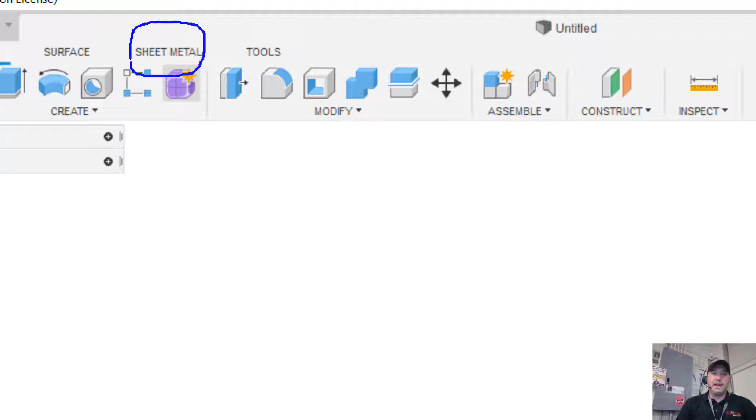So let's go ahead and jump into Fusion. The first thing I want to do is come up here, and you can see that there's a sheet metal tab. If we pick on the sheet metal tab, the first thing we need to do is set up what our sheet metal rules are, so I'll go ahead and pick on that.

And down here we can see steel and inches. What I'm going to do is come here and hit the little pencil, and I'm going to put in what my thickness needs to be for my paper thickness for my box.

So I'll grab a set of dial calipers. I'm going to measure something like cardstock, which is basically what our packaging would be, it wouldn't be like copier paper. I'll say I measure this to be 0.02. So I'll type in 0.02, hit save, and then simply close out.

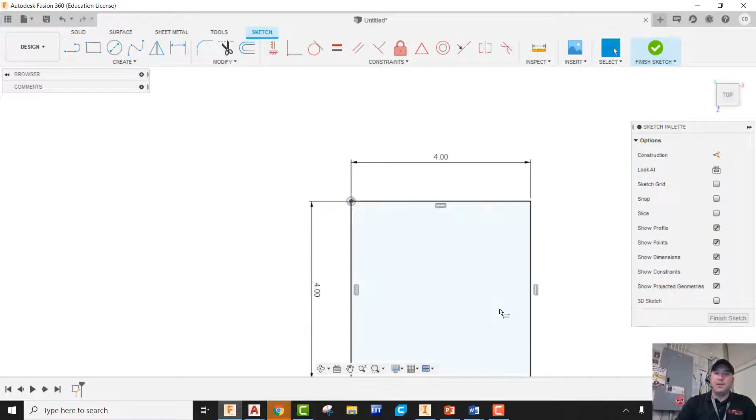First thing I need to do is come up here and create a sketch. I'm going to create the base of this, and let's say the base needs to be a package, 4 by 4. I'll go ahead and hit enter, and just finish the sketch. All right, so that is done.

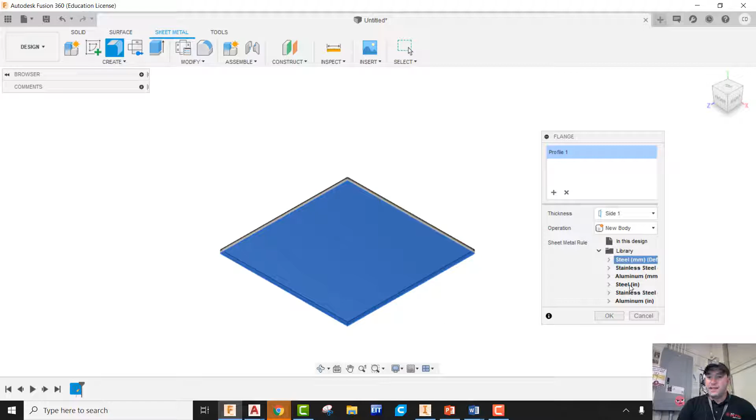What I'm going to do next is come up here and pick on flange, and when I pick on flange, it's now going to ask me to pick my profile. I'll pick the profile, and it's going to apply that 0.02 thickness of my paper to that actual flange itself. Now I need to make sure to be picking the correct rule, which in this case is steel inches, and I'll go ahead and say okay. So it's just going to be this very thin sheet, which in our case is actually paper. It's thinking it's steel.

So now we can go ahead and begin creating the box. What I would do is bring in packaging from home, pick up cardboard boxes, and see how basically all those are created by kids just taking the boxes and pulling on the tabs, unfolding all this, and seeing if there's ways that you can fold it. There will be different tabs that you can apply glue to.

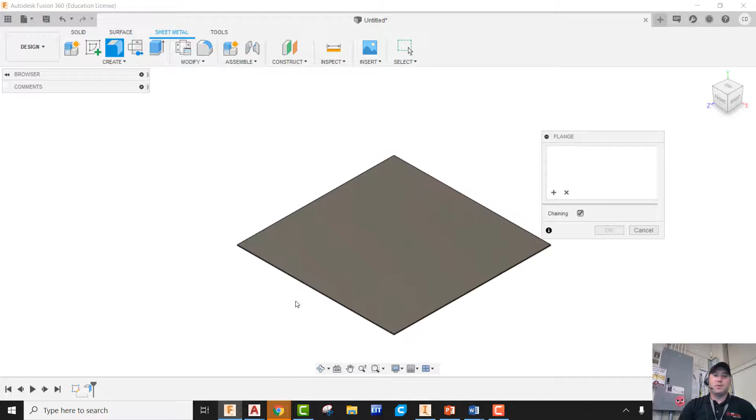That's really what they need to analyze first, to see how these packages are actually created. And then from here, this is when I'd be coaching my kids of, well, let's just create a simple box. So in order to do that, I'm going to come up and pick on flange. To create this flange, I'm just going to sneak right in here and grab the inside corner of this package. I'm going to be doing that on all 4 of these edges, so that's going to be number 3.

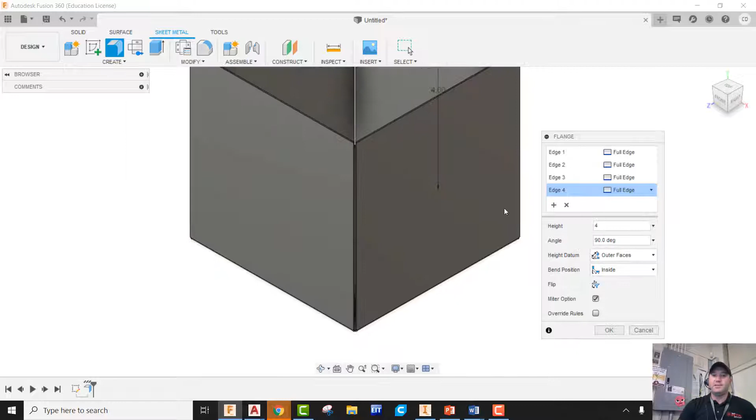And then number 4 needs to be this guy right here. The height on that, we want our box to be 4 inches tall, so I'll go ahead and type in 4, and we can see all those sides come up. I'll go ahead and just say okay. All right, so that has been done.

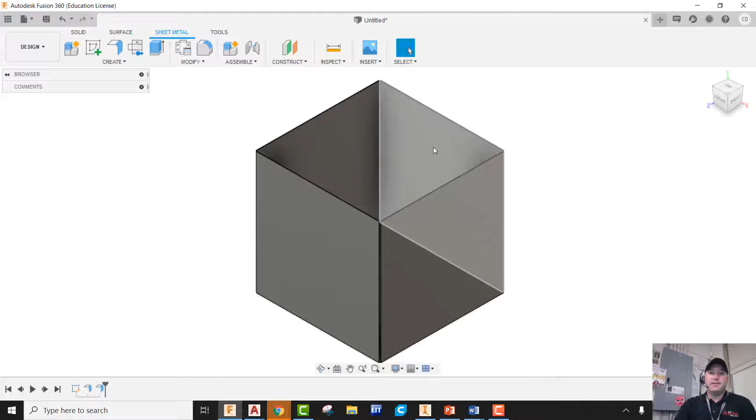Now what we have to do is start setting these up where we have these glue tabs that we want to use to bend in and then basically glue these sides together. So in order to do that, I'm going to go to flange again. Instead of turning this in to go to the inside, paper is very, very flexible.

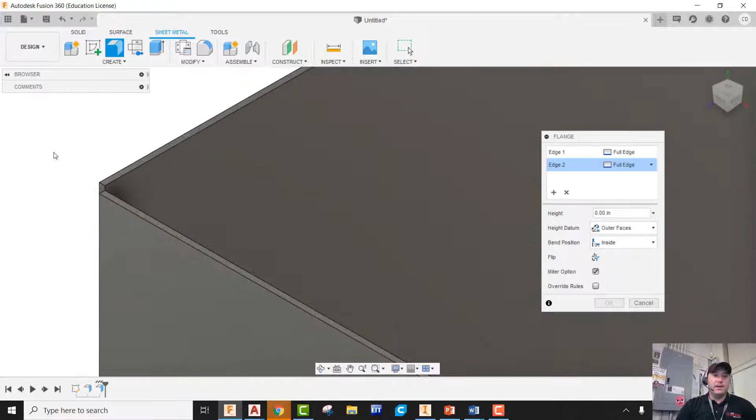All right, there's a lot of give when it comes to paper, so instead what I'm going to do is send these to the outside, okay, like so. That's going to be 1, this is going to be my 2, and then I'm going to come over here and pick my 3. Let's see if I can get to my 4 from this side. I might have to flip this over. I'm going to flip this side over like that. All right, so I have all 4 of those corners that I'm wanting.

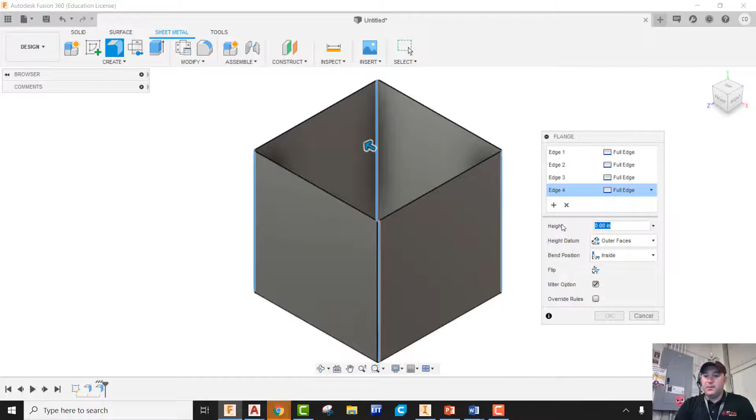And then what I'm going to do is go ahead and just put down, maybe I want this to be 1 inch. So those are going to come out 1 inch. I'm going to go ahead and say okay.

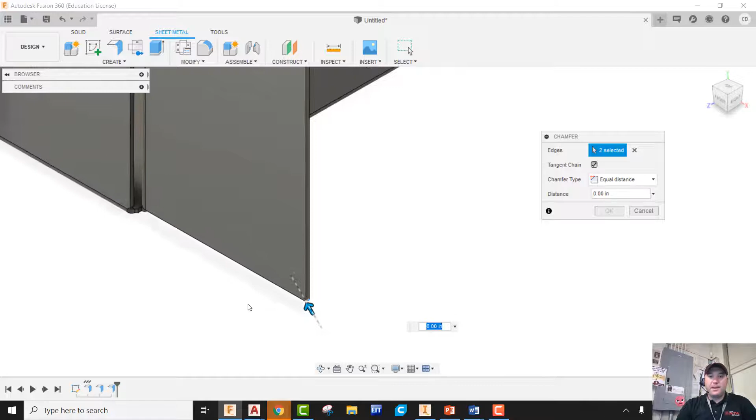All right, so when you're looking at glue tabs and packaging, basically they are either chamfered or filleted. So I'm going to come up here, go to Modify, find Chamfer, and go ahead and pick on this corner, and come down here and pick on this corner, and then come over here and pick on this corner, and pick on this corner.

I'm going to go ahead and apply this. I'm just going to say it's going to be a 0.5 chamfer. That'll work, or we could even say, well, we'll just leave it at 0.5. Let's just say okay on that.

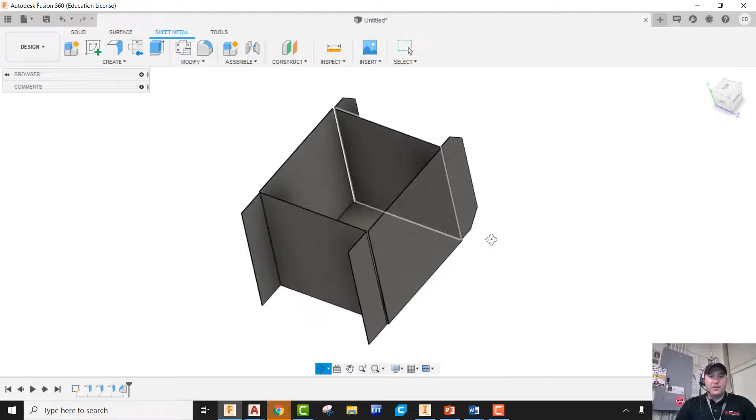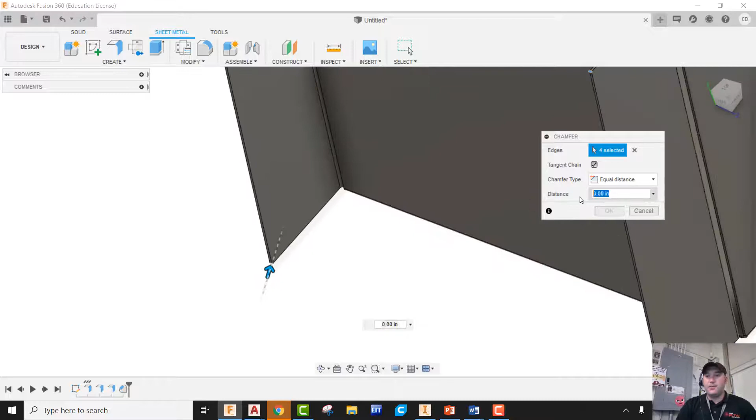All right, I'm going to flip this around and go to the other side. Go down to Modify, go to Chamfer. I'm going to come to this edge right here, apply that chamfer on that edge. Come down here to the bottom, go ahead and apply the chamfer here. And then apply our chamfer on this top edge, and then come down here and apply a chamfer here. All right, so I'm going to go ahead and type in 0.5 there.

All right, so once again, those are going to bend in, and then we can apply glue. In this case it would be on this side, and that's going to be bringing that side together. All right, so that is basically it for those tabs.

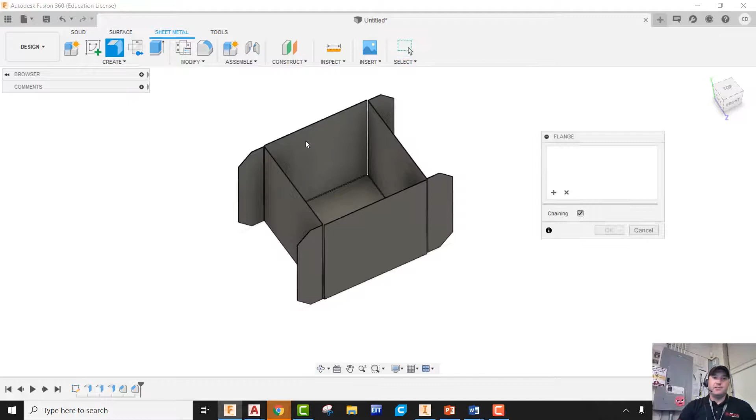All right, now what we have to do is come up with the actual top flap itself. So I'm going to go to Flange, pick this back side here. Obviously that needs to come out a distance of 4, so it's going to be 4 inches. I'm going to go ahead and say okay.

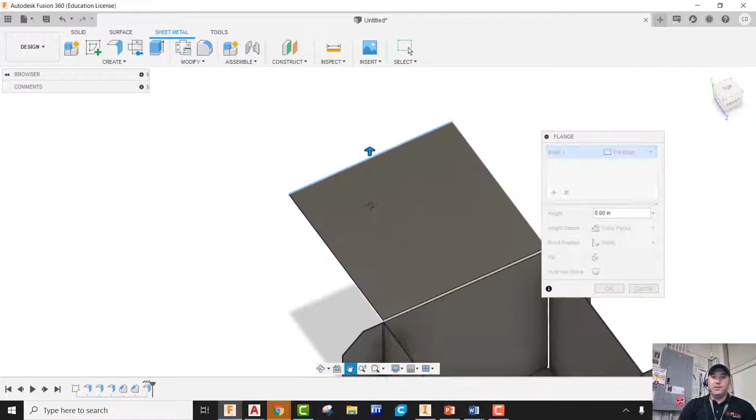All right, so we have that top flap, but we are going to need this actual little flap that tucks into the package. So I'm going to say flange on this one, come in here, grab this edge, and then just go ahead and put that like 1 inch. All right, so since I want that to sort of tuck in and be kind of nice and neat, I'm going to add a fillet on this so I can grab this edge, come down here to this side, grab this edge, and then apply my 0.5 radius on that just to round it over. Say okay. All right, so that way it just sort of tucks into the front here.

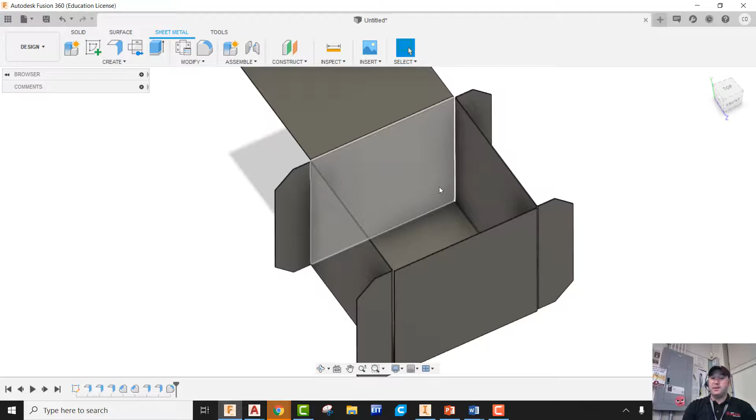All right, so that has been completed. All right, so I also want sort of tabs or flaps that are going to come in and be able to actually cover up what our actual product is. So I'm going to come here and go to Flange, go ahead and pick this side here, and then come over here on the other side and pick this edge here. And since I want those both to meet in the middle, that's a total distance of 4, so I'm going to be making both of those 2, like so. Okay, and that's sort of it.

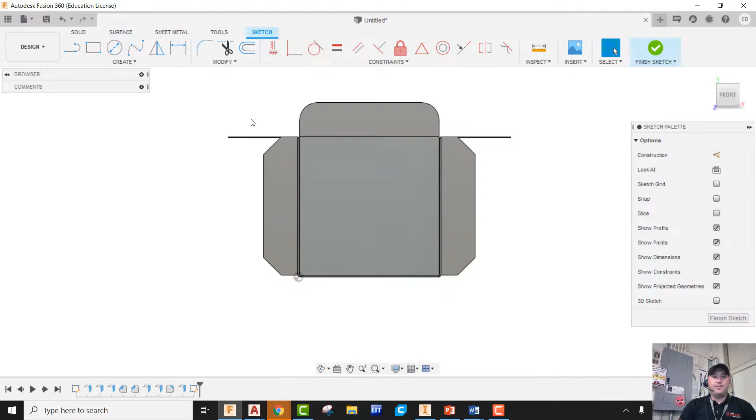All right, so at this point in time, this is when we could start applying decals to it. So what I'm going to do is come out here and say I want to create a sketch on this face. Maybe I want to go out there and put in some sort of a UPC code or something. I can say decal, and now what I can do is insert from my computer.

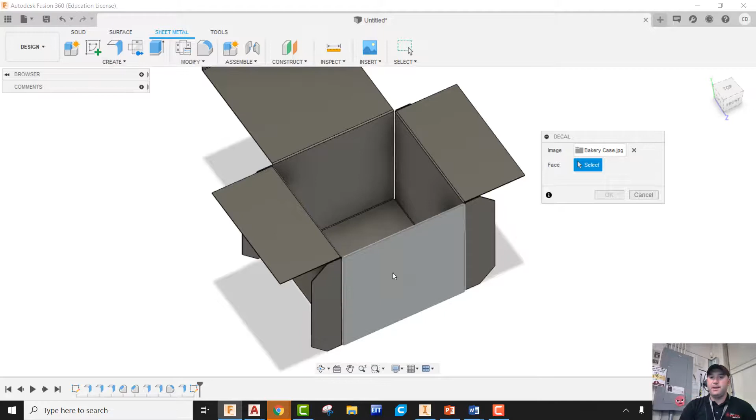I can go out there now and find my UPC, which I think I saved earlier. Maybe it didn't grab it, but let's just go ahead and put in some sort of image. I'm just going to select that face and let that image go in. At this point you can rotate it if you'd like, or shift and move it. For your sticker, you can say OK, and there's your image on that one.

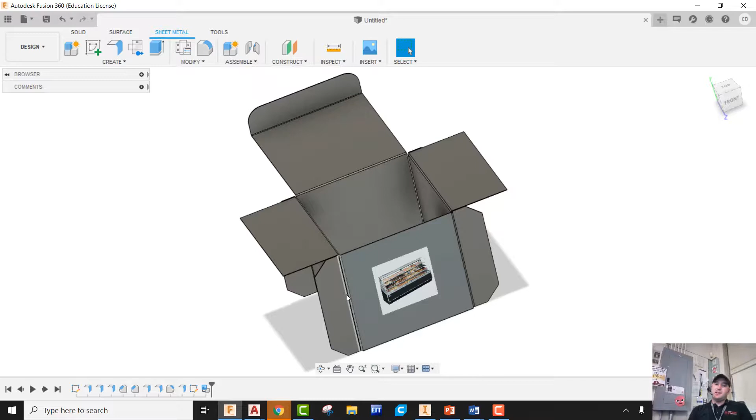So the product is basically done, it's ready to go. I know it looks funny because we just threw our flaps out, but the reason is because I want to come out here and create a flat pattern. It's going to ask what you want to make stationary, so I'll say I want to make this one stationary and hit OK. And that is my actual package that I just created - it just unfolded everything.

I can see that is on the front view, I'll remember that. I'm going to pick on Finish Flat Pattern, and you can see how it folds it back up. But what I want to do is come back in here to my flat pattern, like so. All right, I have it where I want.

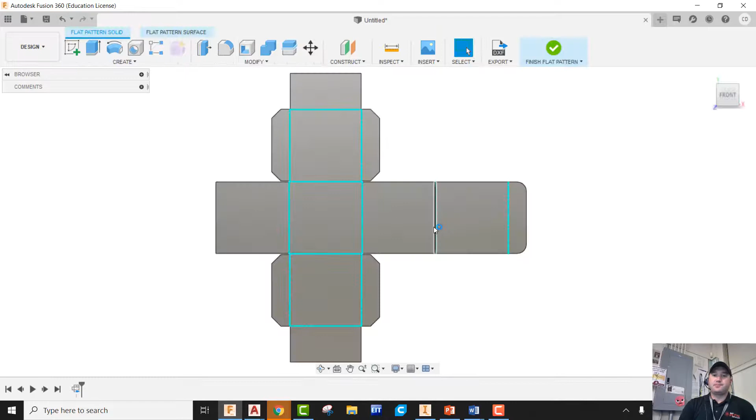Now I'm going to come over here and go into Drawing, say From Design, and go ahead and say Save. Then I'm going to put this on a title block. My title block comes over, there's my actual flat pattern. I'll go ahead and just place it and say OK.

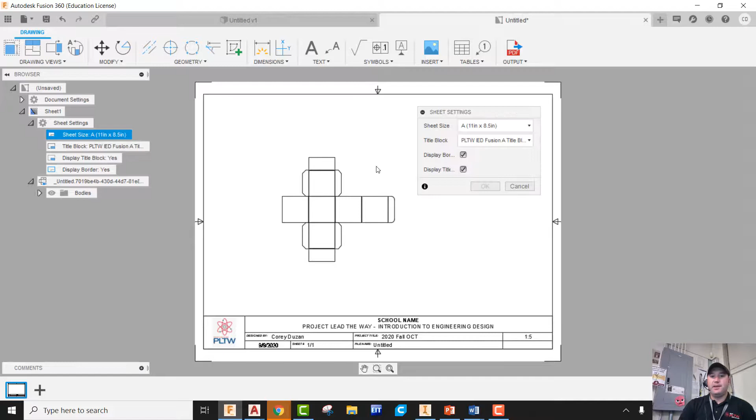The problem is the scaling's all wrong, so I know I'll have to bump my sheet size up quite a bit. I'm going to go to my sheet settings, hit on pencil, and bump this up maybe to like a C size sheet, which will be much larger. I'll double click on this and say I want this to be a 1-to-1, then hit close.

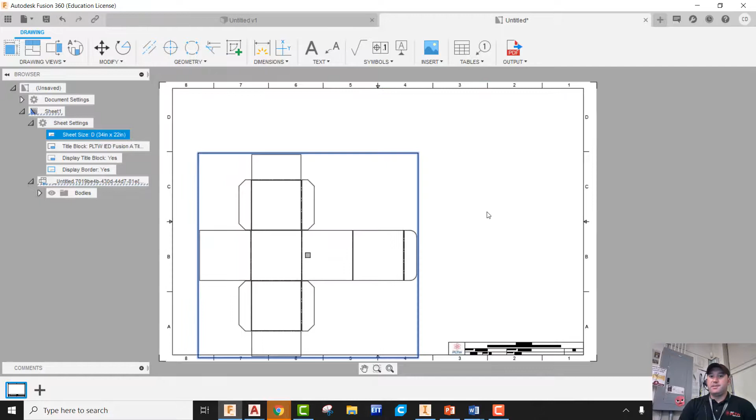I'm going to drag this in, and obviously that's not going to be fitting on a C size. So I can go ahead and just bump this onto a D size, say OK on that. Everything is fitting, so I can easily just slide this into place.

Now, if we look close enough, this is thinking it's going to be sheet metal, so you're going to have these goofy little notches here, but you're also going to be seeing your fold lines here. And that's going to work out very, very well for our actual package.

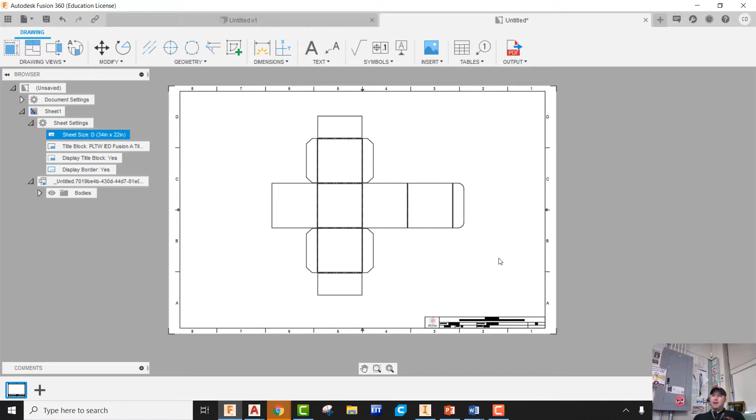So what you could actually do, if you had a plotter - a full-blown large format printer - is actually print this out 1-to-1 on a plotter. Then your kids could go out there, cut this out of the paper, trace it onto cardstock, and then actually bend all this up, and it's going to be the exact same dimensions they just created using Fusion, which is what we were playing with right here.

So it's a really cool concept to play with. Coming up with packaging is an absolutely huge market. I looked up before how much we spend in packaging every year - it's a very big market, there's a lot of demand for it, a lot of jobs with it. So it just gives your kids an idea of what they could do.

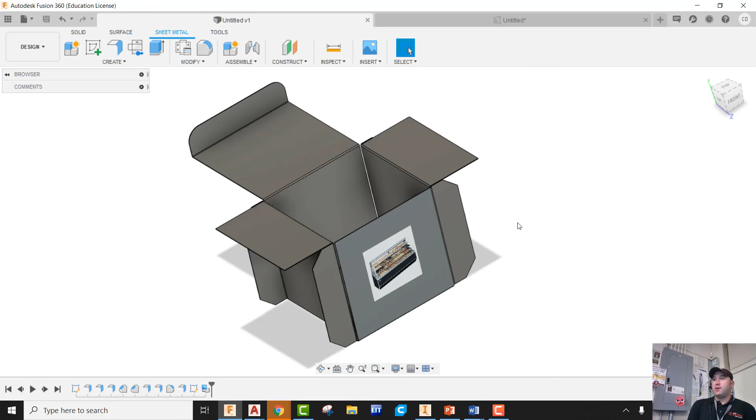And honestly, it's kind of fun with Fusion, the fact that we're tricking sheet metal into thinking it's actually cardstock, so you can do a lot with it. So there you go - that is a video tutorial on how to cheat Fusion 360 and make it believe it's folding up cardstock and not sheet metal. It's a lot of fun, I think you'll have a lot of fun with it. So there you go.